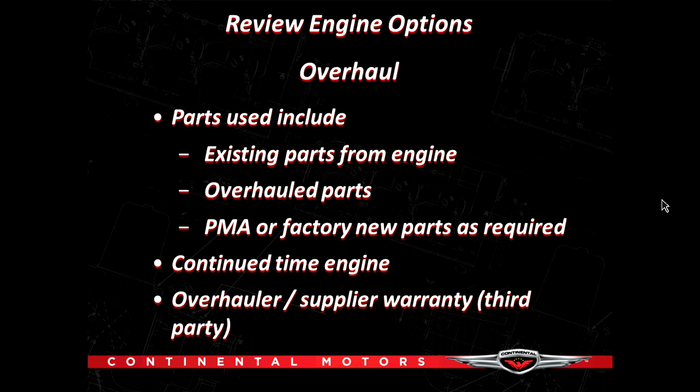It may be zero since major overhaul, but the total time on the engine continues to run. For example, if your TBO was 2,000 hours and you decided to overhaul the engine at 2,000 hours, your engine would be zero since major overhaul, but 2,000 hours total time. That's very key because it can affect the aircraft value.

When we talk about factory rebuilt, which again, another slang, reman, rebuilt and reman are used synonymously within the industry, and the FAA only recognizes the term rebuilt. Reman is sort of a slang term that's been developed over time, but rebuilt is the accurate word. That's the one that the FAA recognizes, and the only people that can grant rebuilt status and zero-time status to a rebuild is the factory, whether it be Continental or Lycoming.

A new engine serial number is provided at that time. The engines are produced to new fit tolerances. We went over some of that last week about the gold standard features in a Continental engine, how they're built to that balanced and blueprinted stage now. The good thing about a factory engine is you receive full core credit for the runnable core. As it comes in, if the crankshaft is cracked or out of dimensional tolerances, the crankcase is out of dimensional tolerances, and all of it has to be scrapped, you're not penalized as you are with an overhaul.

When your engine goes to an overhaul shop and you're quoted a figure of, let's say, $25,000 for an overhaul, and then we find the crankshaft is cracked and needs replacing, well, that's an upcharge, and then the crankcase needs to be replaced, and that's an upcharge, and pretty soon that $25,000 overhaul is now up in the $35,000 and $40,000 range. So we want to be very cautious and understand that with the overhaul choice, you're rolling the dice on whether or not the parts are going to be usable again, and whether or not they will meet service limits.

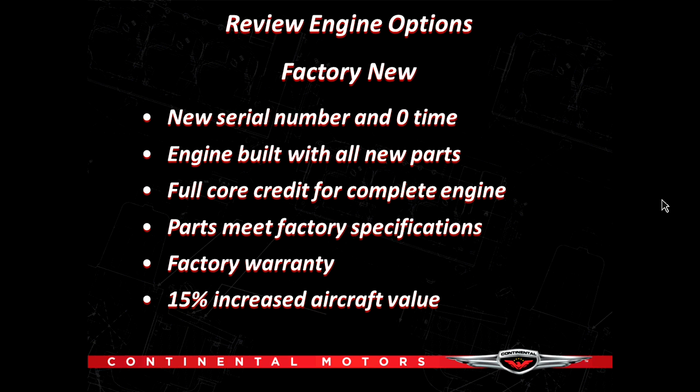The factory rebuilt meets all factory specifications. It comes with a factory warranty, and if you look at the Blue Book values, aircraft values are usually 10 to 15% increased. The factory new is, again, a new serial number, new and zero time. It's all new parts. Full core credit, again, for the engine that comes in. The parts meet the factory specs, and the warranty is intact from the factory. Again, 15% in aircraft value is not uncommon for a factory rebuild or a factory new. That's just a review of overhaul, rebuild, and new.

Tonight, I want to talk about some of the hurdles that we face when we're making this decision. There's a financial element. Certainly at my house, there's a gatekeeper.

I joke when I'm speaking at different forums that my wife has a warped sense of priorities, like our children's college tuition and things like that. She doesn't see the importance of the airplanes like I do. And I'm just kidding. I do value the education, and my daughter is currently enrolled at the University of Alabama.

But we do have a financial decision to make. There's always going to be some associated items that we will want to replace when we are repowering the airplane. When we change the engine, we're going to talk about some of those things. We'll talk a little bit about performance upgrades. There are many options out there for many of the aircraft that you fly, many horsepower performance upgrades that can really maximize the use of our airplanes. And it is key to get the right facility to perform the installation of the engine.

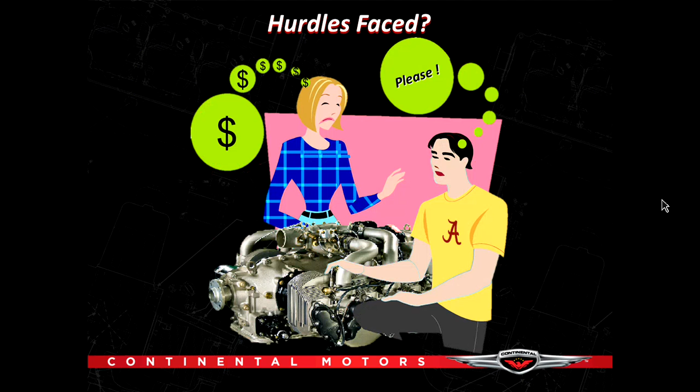You notice my friend there in the cartoon is wearing an Alabama shirt, so I'll shout out a Roll Tide to all of the Alabama fans out there.

But this is something that often comes about, and it could be the wife who is the pilot, and the husband on the other side of the equation. But this is a typical decision that has to be made.

I tell the story a lot of times about how we have a small farm here in Mobile, my family does, and I used to spend a lot of my time cutting grass in a pecan orchard and things like that, and I finally talked my wife into allowing me to buy a 17-foot wide mower, and I did it by telling her that the 17-foot mower would let me cut the pecan orchard so fast that it would allow me to have more time with her. Now you pick how you want to work on your spouse or significant other or whatever, but that is certainly a hurdle to get over.

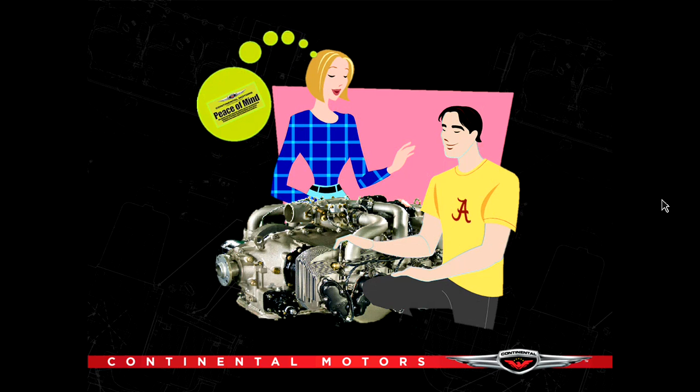In all seriousness, when we're talking about an aircraft engine, we're talking about peace of mind, and we're talking about safety and reliability of you and your family and your passengers, and trying to minimize liabilities and things like that. There is a peace of mind in knowing what is in your aircraft engine, whether you go to a reputable overhauler or you go to the factory to get the engine.

Now, I want to talk just a few minutes about replacement items, because we run into this all the time with customers who come in to Continental Motor Services located in Fairhope, Alabama. I mentioned that last week, and I'll talk about it a little more. That's our service wing, or MRO, of Continental Motors, and we do many, many installs at that facility of factory engines. I think we're probably the best in the world when it comes to installing the factory engine.

But it surprises me that there will be mechanics that will install new, rebuilt, or overhauled engines into airframes, and they will skimp on or forego changing engine mounts and hardware. And this is one of the things that's very, very key in the smoothness of the engine, is to have those items replaced. 9 times out of 10, when we in technical support get a reported vibration in an engine, it is simply an isolation issue. The engine is not isolated from the airframe. Either the mounts are worn or there's something in contact that doesn't provide the proper vibration isolation.

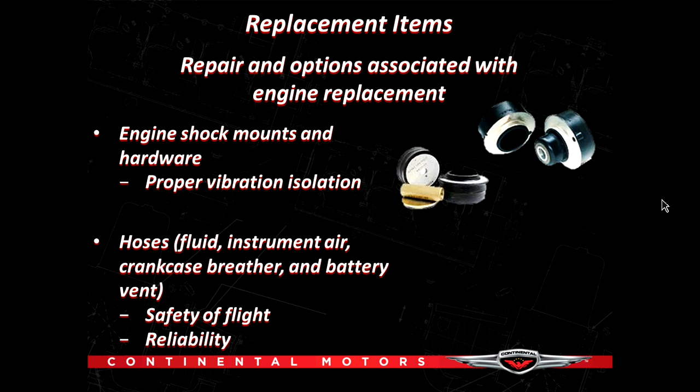I'll tell you a quick story of a time when a customer purchased a platinum engine. At the time, Continental was building platinum engines, and we talked about that a little bit last week, that Continental learned from the platinum engine, and now we build our engines to that specification. But at the time, it was a cut above the standard rebuilt or new engine. So the expectation is that it would be a much smoother engine than the standard engine. Had a customer that purchased one, and a mechanic installed that engine, and they reported a vibration that shook the instrument panel. It buzzed in the seats, it buzzed in the rudder pedals, and to fly the airplane, one would think that the engine was coming apart.

I was dispatched to that as a young tech rep at the time, and flew the airplane with the customer to do a look, listen, and feel. It became very evident to me that this was an isolation issue, just based on past experience. I opened up the cowling, did a cursory inspection of the engine, quickly saw an induction clamp, just a simple clamp, and the tail of the clamp was in contact with the engine mount. I asked the mechanic who was there for a slotted screwdriver. I loosened the clamp, adjusted it off of the mount, retightened it, and the owner and I flew again, and he told me that was the smoothest engine that he'd ever been behind. So we went from perceiving that there was an internal problem with the engine in torsional vibration to something very, very benign, which is just simply isolation.

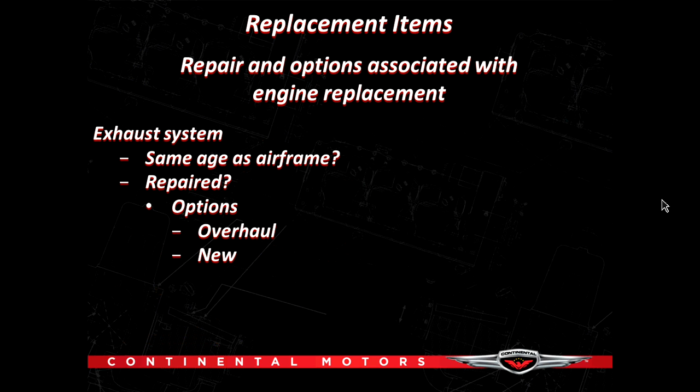Another thing that's key is an exhaust system. Many times these exhaust systems are the age of the airframe. A lot of engines that we produce here at Continental Motors do come with new exhaust systems, but many of them do not. That was specified from the aircraft manufacturer. Many of the Cessna products were outfitted with the exhaust system at Cessna. And that's something that one wants to look at very, very closely.

In my short biography that I gave last week, I talked about working in engineering and analytical and accident investigation. And you'd be surprised at the number of problems that can arise out of a disrepaired exhaust system. I've seen countless leaks and cracks that can manifest themselves into other engine problems. For example, a turbocharged engine leaking exhaust can superheat induction air if it's near the induction system, and can raise the induction air temperature to a point where we could experience detonation, and that certainly will ruin your day. So we don't want to skimp on those things either. So we want to look at those items.

If you've spec'd an engine, you've purchased an engine that comes with an exhaust system, fine. If it does not, you certainly want to have that exhaust system overhauled or inspected or replaced. Again, it's not that big of an investment, and it certainly can go a long way in providing good life out of the engine. So make sure that your maintenance provider is considering that when we're looking at the engine change.

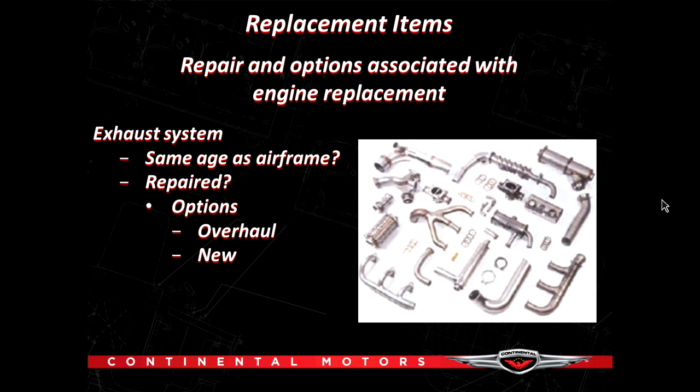Also, when the engine is replaced, and I'm speaking for constant speed propellers, those propellers that we can change and vary the pitch on, it's important that those propellers, if they've not been serviced recently, be overhauled, flushed, and cleaned at the time. Particularly if, let's say, we've got an engine that's way up in age, it's past TBO, we're starting to see some metal levels in the filter that are starting to rise. It is very important that propeller and governor be sent off and flushed and overhauled, because those items can be contaminated with the metal that's being displaced within the engine. So never skimp on that.

If your engine and filter are clean and you just a couple of hundred hours ago had an overhaul of the propeller and governor, that's fine. But if you've had any increasing metal in both an oil analysis or on looking at a filter or screen, it would be very prudent to go ahead and send that prop off to have it at least flushed, if not overhauled. And the same thing with the propeller governor.

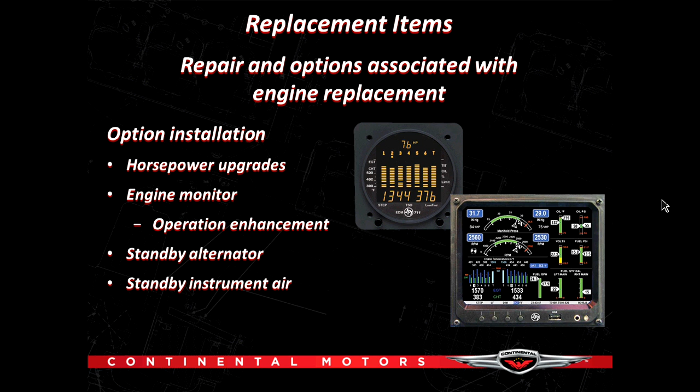And standby instrument air is another feature that, depending on the model, you may want to consider at the time that you're doing the repower. Proper installation of the aircraft engine. I can't stress enough how important this is. Last week I talked about this, and if I've heard it once, folks, I've heard it 1,000 times.

Well, the guy that's putting in my engine in my Bonanza worked for the airlines for 34 years. Well, that's impressive, and I applaud that service to the airline, but that's not a Continental engine in a Bonanza that he's working on. In fact, at a lot of the airlines, the mechanics are very specialized. So you may have a mechanic whose specialization was DC-9 landing gears, and then he's going to be putting your engine in your airframe. Be careful about that. There are some questions that you want to ask as to his qualifications. How many times have you put in an engine? How experienced are you? How experienced are you in troubleshooting?

One of the things that we do at Continental Motor Services is when the airplane is delivered to us, we always do a look, listen, and feel flight, and we record a lot of data on that flight. We look at cylinder head temperatures, fuel flows, aircraft speed and rigging of cowl flaps, and the list goes on and on. We take many pictures of the installation. We often find items that are out of specification or routed incorrectly, or not routed neatly, or routed in such a way that will transmit torsional vibration into the airframe. That's a nuisance for us and our passengers to hear and feel, but it's also taxing on the airframe to go through life with those added torsionals.

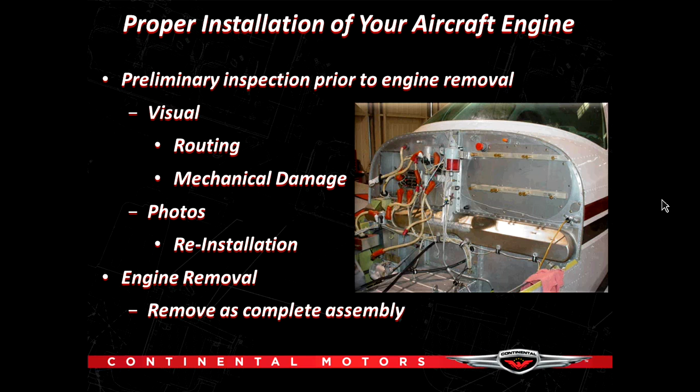If the owner wants a repower, he can call us. We order the engine. We get it from the factory. We take it to Continental Motor Services. We build the engine up and get it ready so that when the airplane arrives, we take the engine out as a complete assembly after the flight and after the pictures. We send the propeller governor to our facility to have it overhauled, and then we remove the engine and reinstall the engine as a plug-and-play package, as a complete assembly. Very important that you have somebody that's very, very competent and that has done that before.

Here is an example of one that we did at Continental Motor Services. This is a unique example. This is an A36 Bonanza with an IO-550B installed in it. The owner came in with, we'll say, a tired engine. The engine was certainly nearing TBO, and he was complaining of a high cylinder head temperature on number 5. When we got the airplane, it was a very nice Bonanza. We looked at the airplane. There were a lot of things in what we would classify as a state of disrepair with the baffle condition. The squawk was high cylinder head temperature on number 5, and the owner was thinking that this was somehow correlated to the engine time.

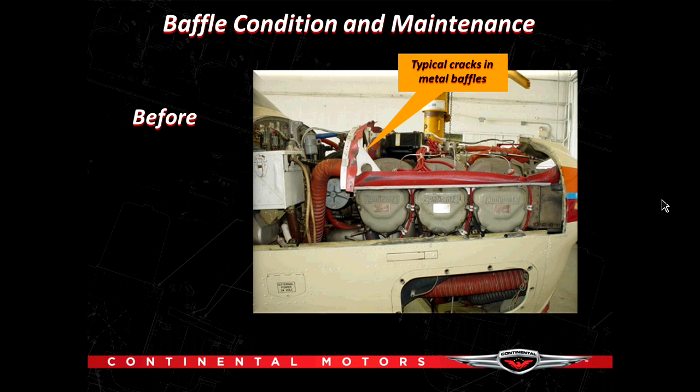There were some other things that we noted, that there were cracks in the metal baffles. That's another place where air can escape and rob the cylinders of cooling air. The baffle seal on the side was making minimal contact with that upper side cowling. When we dropped the cowling down, there was a gap in there. So again, we had more air escaping around the side.

And if you look at cylinder number 5, that was the one that he really complained of as being high. The baffle seal was collapsed. It wasn't contacting the upper cowling, and there was a large escape of cooling air around cylinder number 5. That cylinder was running hotter than all.

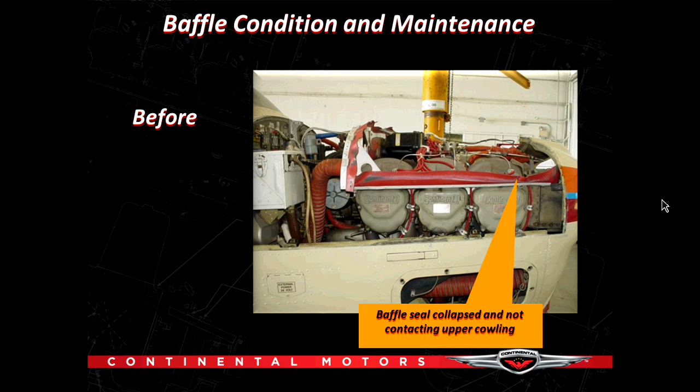I talk to so many people that start to have cylinder head temperature problems, and you ask either the owner or the mechanic or the pilot, whoever, what's the condition of the baffling? And they say it's just great. There's no problem with the baffling. We go out there, we find those things that I just went over, those cracks and those minimal contacts.

We've even gone out and found bird nests within the intercylinder baffling, and mechanics are telling us that the baffling is just fine. Never skimp on that. Always protect that investment and make sure that that baffling is in good order. D'Shannon makes a very nice baffle for those of you who have a Bonanza, and it makes a very, very clean installation.

Also, when the engine is installed, and I'm speaking particularly for fuel-injected Continental engines, it's very important that the fuel system be set up in accordance with Service Information Directive 97-3 or the latest current revision of the Maintenance and Operator's Manual for that particular engine. You'd be surprised at the number of engines that never have this done. And mechanics always say to us here at the factory, those who don't know, well, didn't you set the fuel system up from the factory?

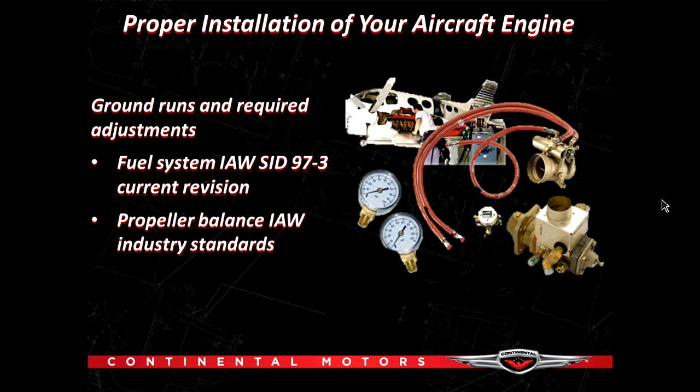Also, during the life of the engine, don't neglect oil changes. That is very, very important that you do the oil changes, that you look at the filter, look at the constituents within the filter, the screen, whichever you have. Always make sure that your maintenance provider is cutting the filter and examining that. Even if you're on oil analysis, make sure that filter is being cut and that those pleats are being inspected for changes. That's what we're looking for, is changes.

It's not uncommon to find a little metal in these engines. It's uncommon to find part numbers. You start seeing part numbers, it's probably time for some unscheduled maintenance. But in reality, what we're looking for is a relative change over time, both in the oil analysis and in the filter. Fuel system adjustment, I think I beat that dead horse to death. Very important. Baffle condition, I did that too.

Air filter is another item that's skimped on and overlooked. On the oil analysis and on the visual inspection of the filter, if I wash the constituents of the filter into a clean Petri dish and look at it under magnification, I can see how well the air filter is functioning, or the induction system as a whole.

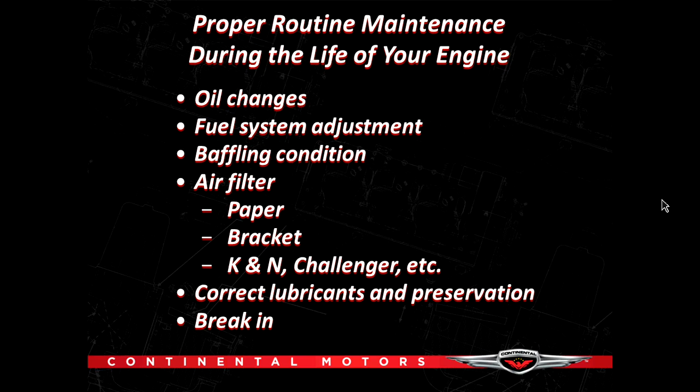Again, SIL 99-1 is a good document to look at if your airplane is going to be sedentary for a while. Look at that document and use that for lubricants and sealants, and also the document on preservation. It's very, very important. That can also be determined by how humid it is.

If any of you have been watching the weather here in Mobile, Alabama, over the last few days, we have really had some rain. It's been extremely humid here. I categorize it as absolute humidity. We had a little relief today, but we're in store for a 100% chance of rain for the next 3 or 4 days. Very humid climate, and that can lead to corrosive attack for engines that sit for a long period of time.